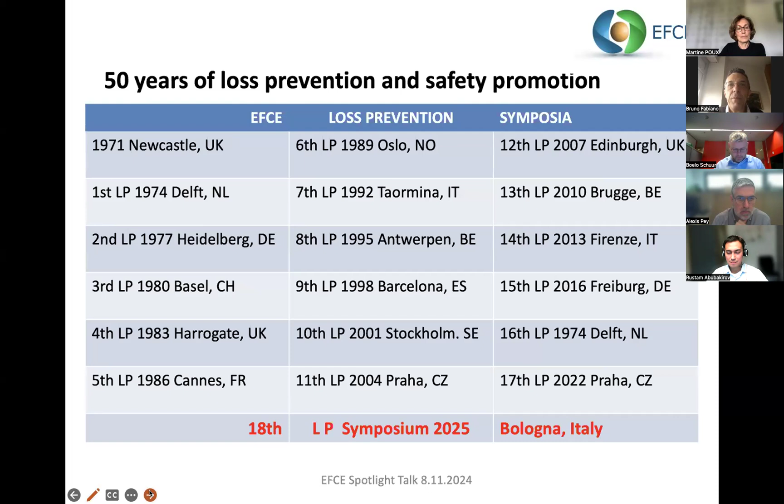The Loss Prevention Working Party organizes every 3 years the Loss Prevention Symposium, aiming at disseminating process safety good practice, discovering new techniques and approaches, gaining experience and lessons from past incidents and near misses, and allowing international networking among academics, industrial experts, and consultants.

In the next slide, you can see that on the loss prevention website, under the section history, you can find the content and full papers of all symposia, representing the history of safety and loss prevention, with free download. You can find the link on the EFCE website.

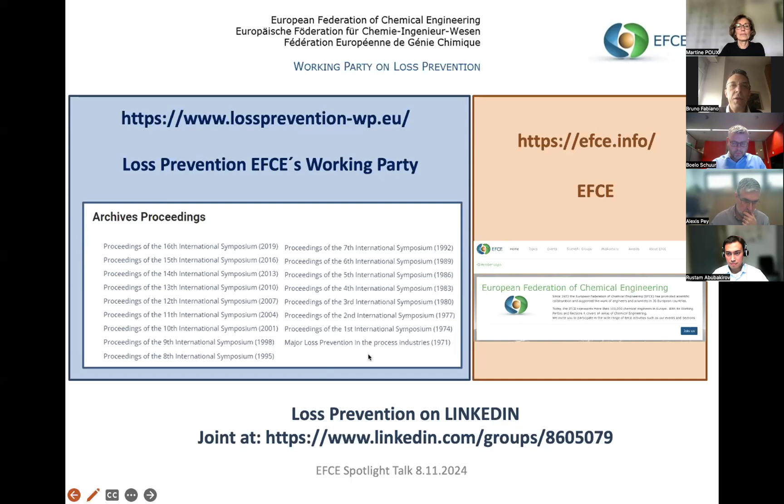On this ground, the following symposium, the 18th, will be organized in Italy, in Bologna. You can see in the following two slides the leaflet of the Loss Prevention Symposium, and the next one shows that Bologna is the oldest university site in Europe.

In this symposium we introduce new topics which take into account the newer needs of industries and the EFCE efforts to transmit the key messages relevant to energy transition, carbon-free, and safe and sustainable industry.

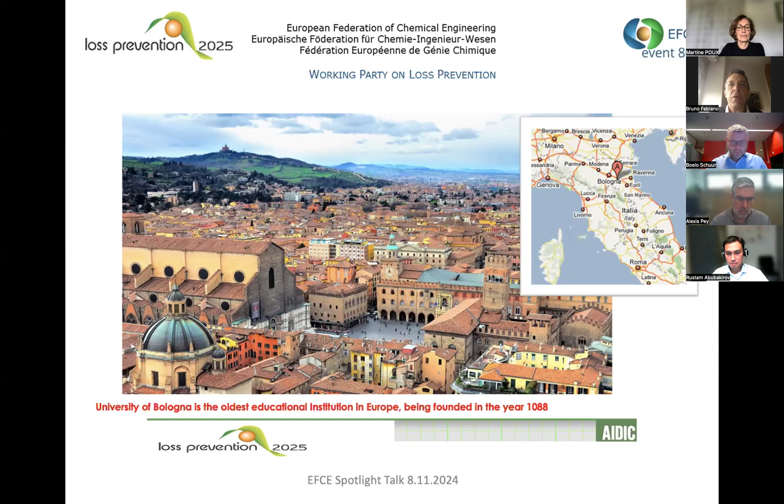In the next slide you can get an idea of the current topics: safety 4.0, AI, digital transformation, sustainability and resilience in the process industry, new materials and technology, and safety and security of chemical and energy infrastructures — really up-to-date topics.

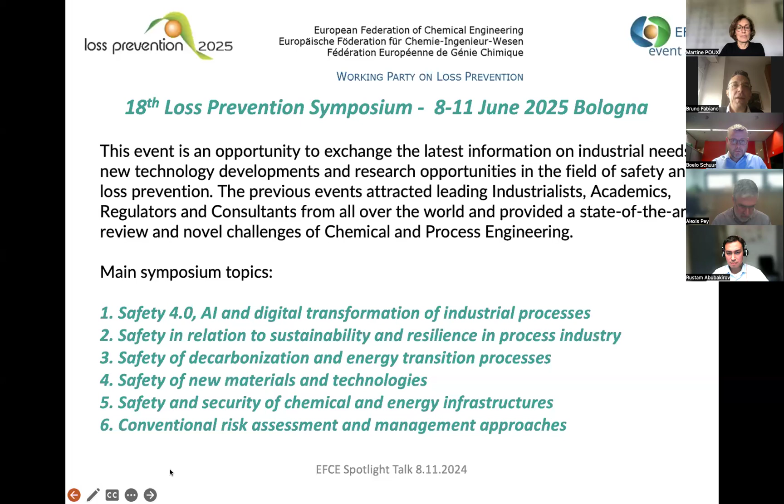Additionally, as you will notice in the next slide, in light of the recent issues posed by energy transition, digitalization, and required risk consideration and assessment methods, there are a number of specialized sessions planned and chaired by leading experts — for example, cybersecurity in the digital era, safety of liquid hydrogen, and integration of process system engineering with machine learning, and so on.

On these grounds, this webinar is organized to provide a flavor of the symposium, and it covers in its program both technical and human organizational aspects of the expanding loss prevention and process safety horizon.

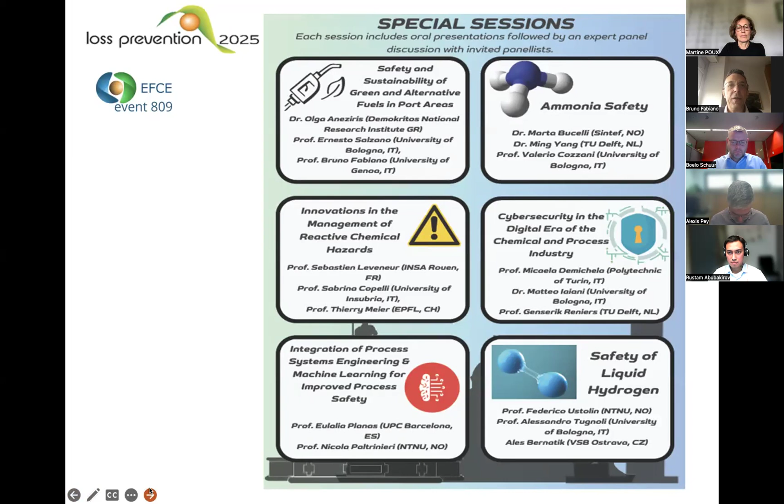The next slide shows that we have five contributions, and I hope that you can sample novel ideas and encourage cross-fertilization between specialist areas.

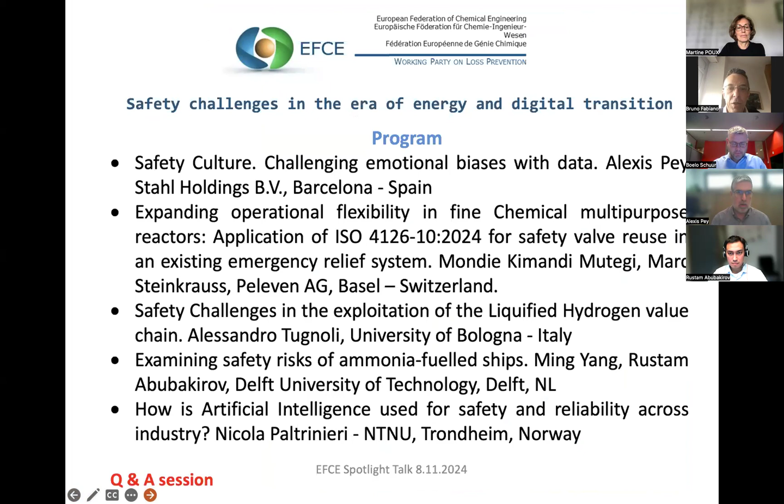Let me spend a few words about the speakers. The first one, shown in the next slide, is Alexis, who holds a PhD in chemical engineering and is an expert in process safety in the chemical, pharmaceutical, and food industry. He has worked for over 19 years as a consultant in fields related to risk assessment topics such as major accident, ATEX, electrostatics, thermal process safety, and facility design. He currently is a global HSE manager at STAHL.

The next speaker is Mondie Mutegi, who holds a PhD degree in mechanical and process engineering and has over 10 years of professional experience in the field of process and plant safety, especially in the areas of pressure relief and thermal process safety.

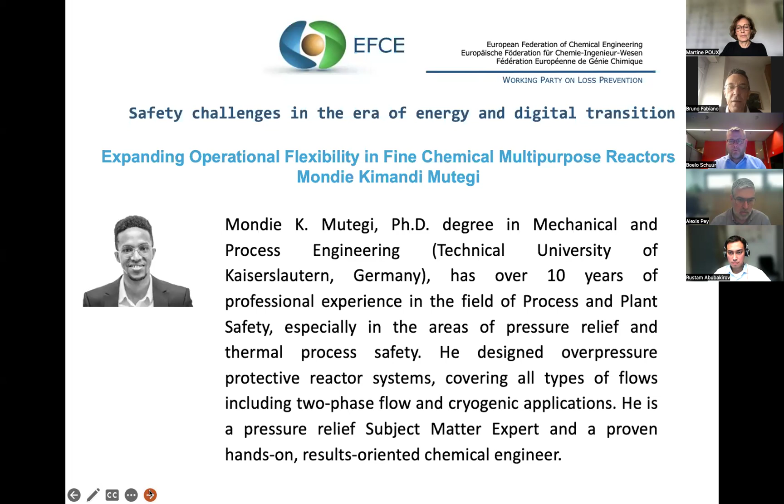The next one is Alessandro Tugnoli, professor of chemical engineering at the University of Bologna. He is principal investigator of the Horizon Europe ELVHYS and NICOLHy projects, addressing the safety of novel concepts for large-scale liquid hydrogen exploitation. The fourth speaker is Rustam Abubakirov.

He is a young speaker, currently a PhD researcher in the Safety and Security Science section at Delft University of Technology, the Netherlands. His main research topics focus on machine learning application for process safety and risk assessment, and safety management of ammonia-fuelled ships. At last, we conclude our spotlight talk with Professor Nicola Paltrinieri, who is Professor of Risk Assessment at the Department of Mechanical and Industrial Engineering at NTNU in Norway.

He is also adjunct professor at the University of Bologna, and he serves as Norwegian delegate of the EFCE Working Party of Loss Prevention and Safety Promotion.

Now it's time to get the spotlight talk off the ground, as the full program is dense with significant topics and we have a tight schedule. I'm not going to lose any more time, and I'd like to wish you all a very interesting and inspiring afternoon. I remember that we shall have a concluding question and answer session, so please write your questions at the end and the speakers will hopefully open the discussion.

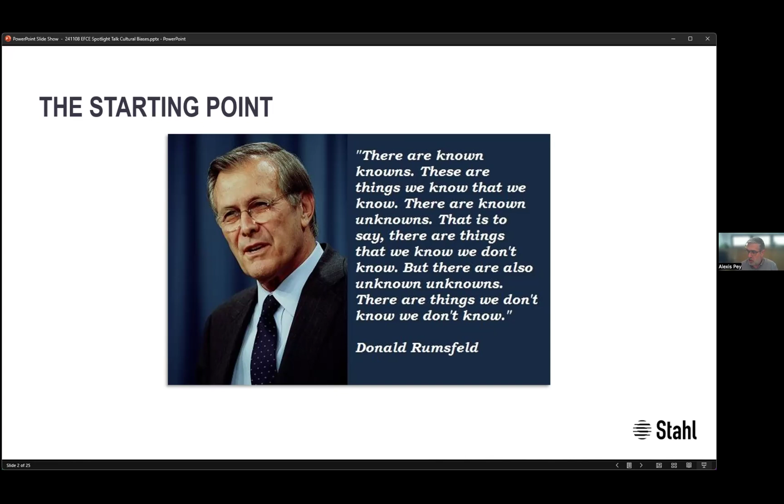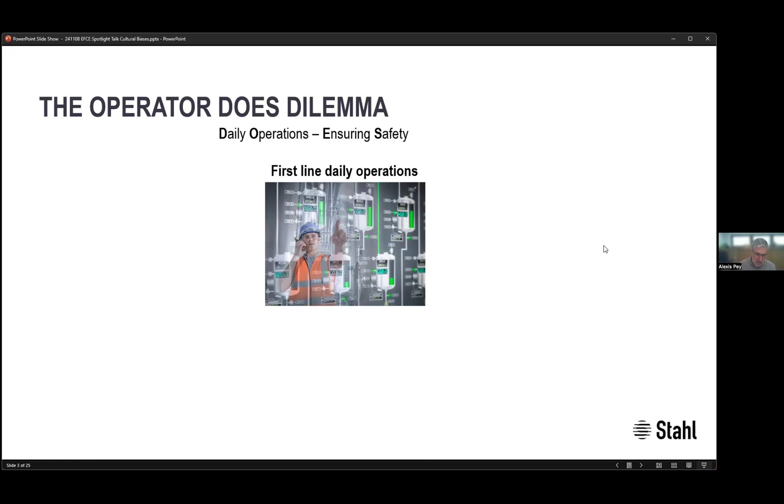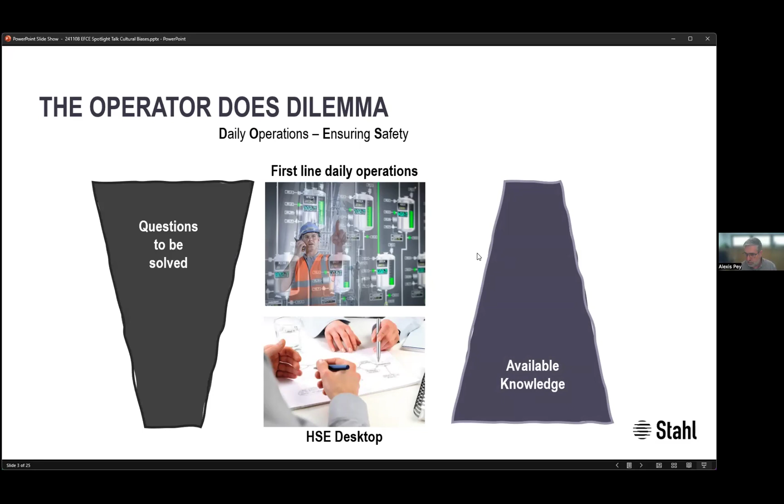So when you apply that in practical terms in chemical industry, we face a situation like this. The operators or the first line daily operations need to perform actions. And many times these actions are defined in terms of safety concepts from a health and safety desktop, somewhere remote to the plant. And the knowledge is not perfect. So typically there are a greater number of questions to be solved than the ones which are known at, let's say, safety or corporate safety departments. But in those departments, many times you have also a lot more knowledge than the one that you end up putting in the protocols, instructions, trainings, etc. So as there is no perfect match, the situation is that sometimes operators need to solve questions with lack of know-how, and at the same time, there is relevant know-how left out of production instructions.

So it is essential to understand the needs. And that is something that we identified at STAHL.

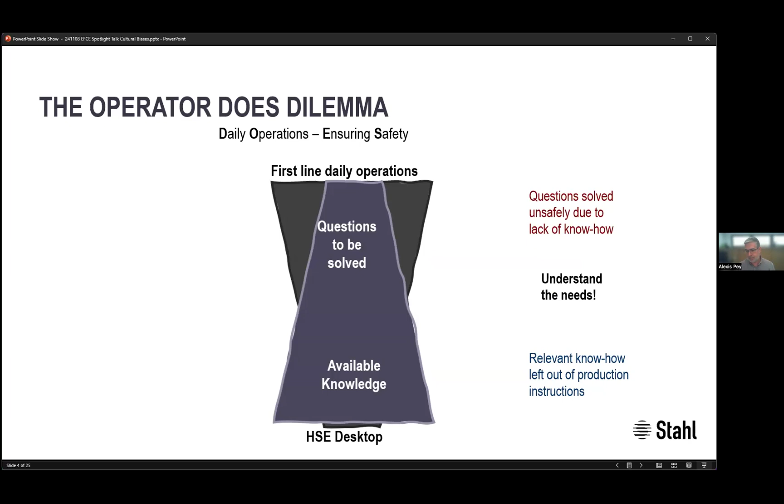And that we kept in mind. To generate statistics, to generate data, you need to be very effective. So what we did is implement an integral tool covering all steps. We wanted with a new tool to have all data collection, all data analysis, and drawing out conclusions from the same platform.

I will go a bit into the details, and then I will show you the results that we obtained when we implemented this tool. So at STAHL, we define three types of reports: damage, close call or near misses, and observations. They are familiar in the safety world, so we'll not explain the difference between them. Just to mention that for us, a close call, or in terms of LOC, loss of containment, is anything below 1 kilogram, and anything above 1 kilogram is a damage.

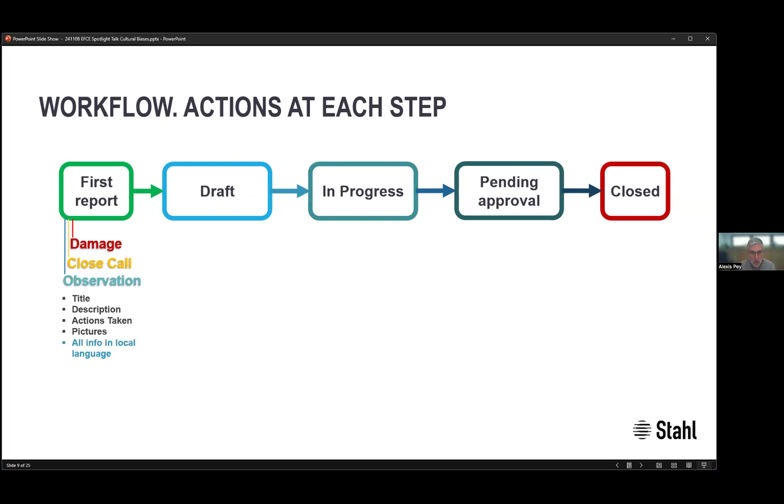We have plants in China, India, Brazil, Mexico, US, Netherlands, so worldwide. And to lower the reporting barriers, you need to allow them to report in local language. So when the first report is submitted, it's a draft. And then if this report is valid, we have to translate things into English, assign ownership, and define the type of consequence.

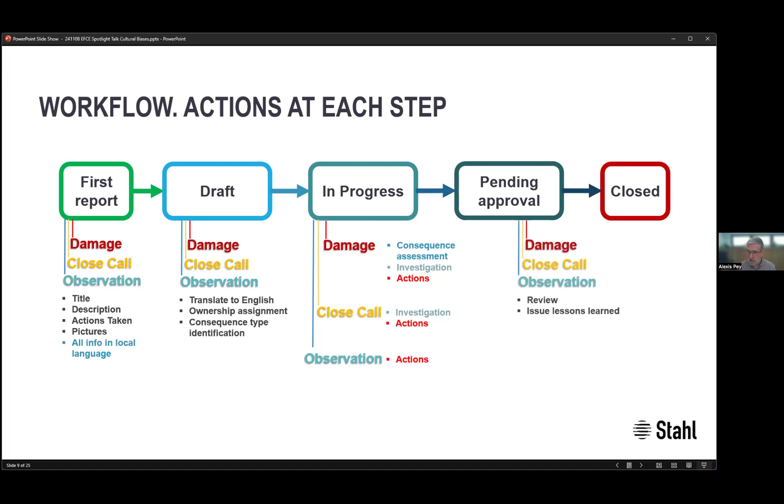And then when it sets in progress, depending on the type of report, there are things to do. If it's an observation, you can directly define actions to correct this observation and prevent it from happening in the future. If it's a close call, the option is there to issue an investigation and also define actions. And in case of damage, consequence assessment, investigations, and actions are mandatory. After that, the event is reviewed, approved, and closed.

The key point here, when we focus to be very effective, is to keep in mind that we need to simplify the understanding of what's happening. So basically, we want to have clearly what is the intended condition, what was the deviation, the cause for the deviation, consequence, safety measures, if they worked or failed to work, and the actions that we will take to avoid this again or to ensure that the intended condition will not deviate in the future.

We developed these concepts. I will not go into the detail of the methodologies, but we developed that together with the operational excellence and global quality managers, because we wanted to standardize practices between departments. So when there is a quality issue, operational excellence issue, or a safety issue, we all use the same tools.

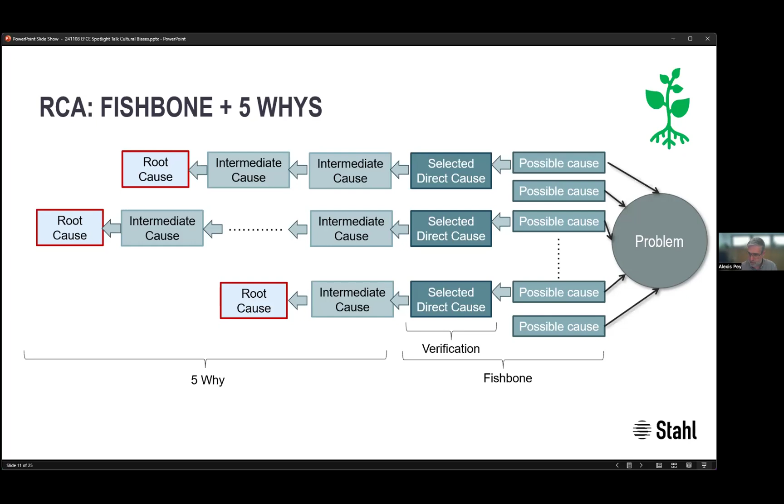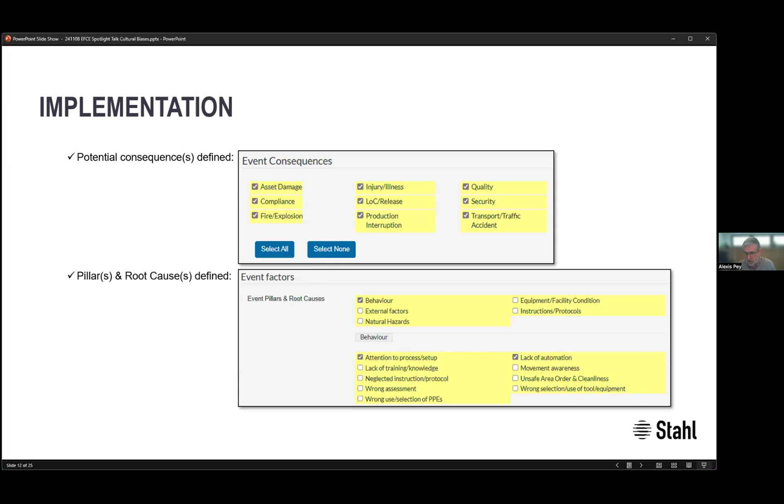And we all do this with some selection list. So you click and there are several levels, but it's not free text, because in case of free text, the data assessment becomes very different, because some people use different words worldwide to refer to the same thing. So the position was, we need to standardize, so we use click lists. We also define the operational conditions and the relevant assets.

What has been the effect of implementing this system? Well, you see the frequency rate in terms of reporting of observations and close calls. And the frequency rate is the number of events reported divided by the number of hours worked and times 1 million. So you see that the increase since we implemented the system is really huge.

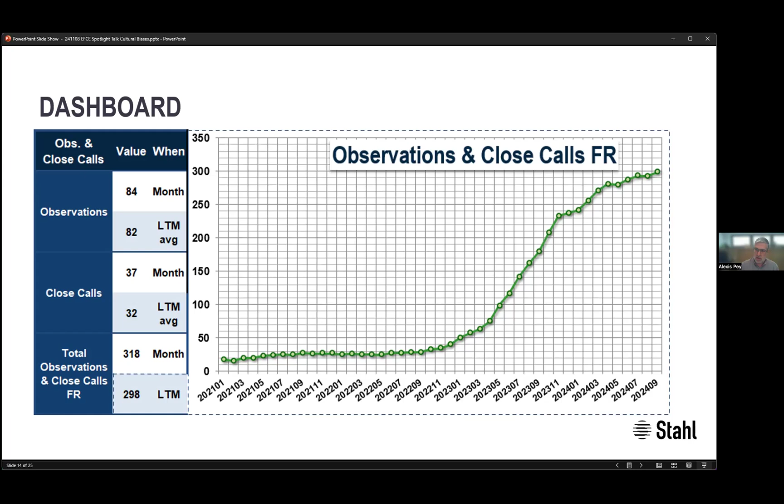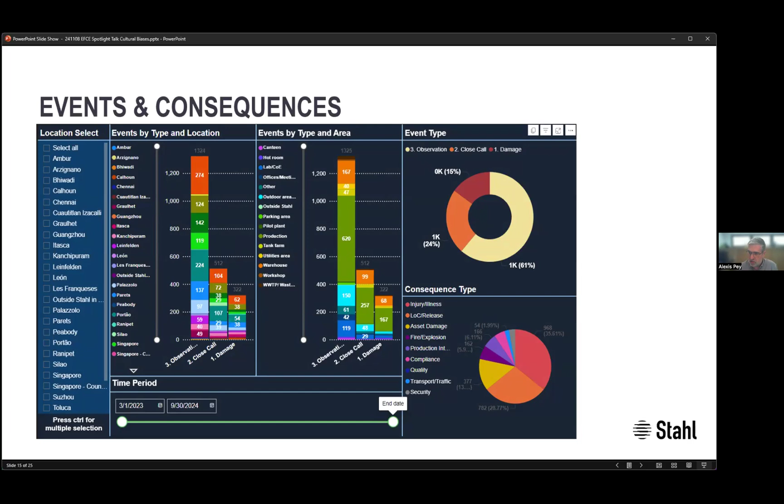So, but this is not the end. Then we also develop some infographics using Power BI, the Office platform from Microsoft, to make it visual what's going on. And this is what all plant managers, safety managers, so everyone at STAHL has access to this info. So they can select what's going on in their plant and then understand what has to be done. So I will show you a few of them.

So the first thing that we can see and we can ask, are we reporting enough? Well, in this figure, you see that we are reporting a lot more observations than close calls, and more close calls than damage, which in terms of the Bird pyramid, it's okay. And that was not the case before we implemented this system.

Also, we can see where is our awareness. If you remember the definitions, a damage or close call, near miss, is where something actually happened. The difference is the level of severity. So we see that in terms of damage or close calls, things actually happening, we have more LOCs than injuries, and more injuries than asset damage. While if we look at the observations, we see that the most observations refer to people potentially getting injured. So we identify that people have more awareness to situations that can cause an injury than situations that can cause an LOC. But in reality, we have more LOCs than injuries. So that was interesting to understand why, for instance, we have this LOC level.

We can also assess the safety pillars, and you see here the safety pillars. So typically you tend to see that many times it's just said most of things that happen are just behavior. Well, in this case, we see that behavior is a very important part, but equipment condition is identified many times also as a critical safety pillar.

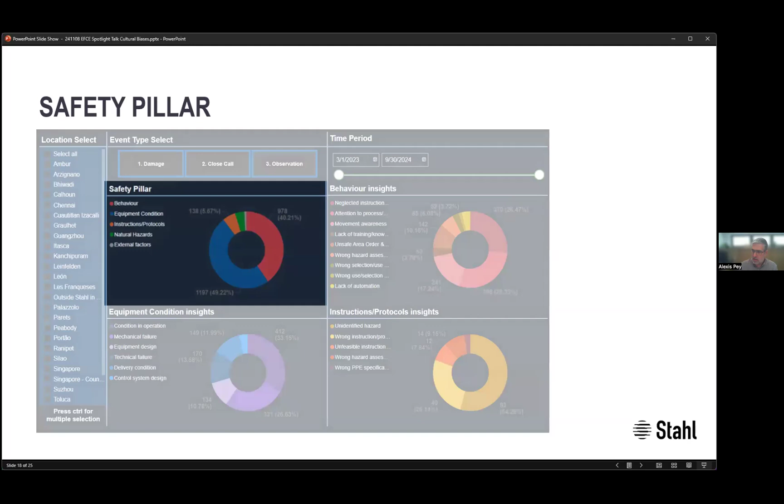And if we go a bit into details of this, the concept that we are applying is, if we compare behavior and assets, equipment condition, we are implementing this concept: if behavior and assets are wrong, then this is really a threat to kill the activity. If you only focus on behavior, but you are not improving the assets, at the end people are really fed up because they want to work in a safe way and they are just fighting with equipment that is not working.

And we saw that also in other safety forums with other companies. If you invest a lot in assets, but the behavior is still bad, basically you are not making good use of money. You are burning money because the assets which are brand new with a bad behavior will degrade or become very easily in a bad condition. So the only sustainable and good corner is where you have good assets and good behavior.

And being fair is important, because if we focus only on behavior, well, we know that we work with people. People is a lot less reliable than any automatic control system. So we need to be aware of that. We need to keep fairness, but also make people understand that safety starts also with behavior. So there is a clear relation.

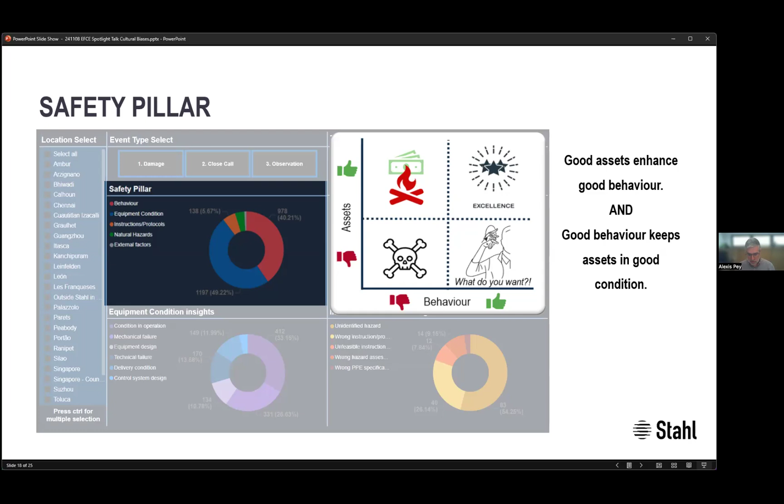Now, if we focus on behavior in sites, what we learned is that a significant number of behavior issues, and this is not just damage, it's damage, close calls, and observations, are neglected instructions or protocol. Why are people neglecting instructions and protocols? Well, time pressure, lack of perception that what they are doing is important to be done in a specific way. And we are addressing that with leadership and discipline.

Be clear and be fair. Because we need to understand that there's a difference. For instance, if you have a checklist with a signature or a confirmation in a control panel and you neglect to do it, typically is a neglected instruction. But if you have just a generic instruction requiring a check, for instance, before starting a transfer, check that the facility is in the right condition. Well, it is requiring a check, but it's not specific, and we can make a mistake. In this case, we classify that as an attention.

The root cause in terms of behavior is not enough attention to process setup. But of course, you can make once a mistake, but twice or thrice. So at the end, we can also assess that as a neglected instruction if we see that this is happening several times with the same person. But we want to remain fair. This is really important. We also could identify that sometimes lack of automation is playing a role.

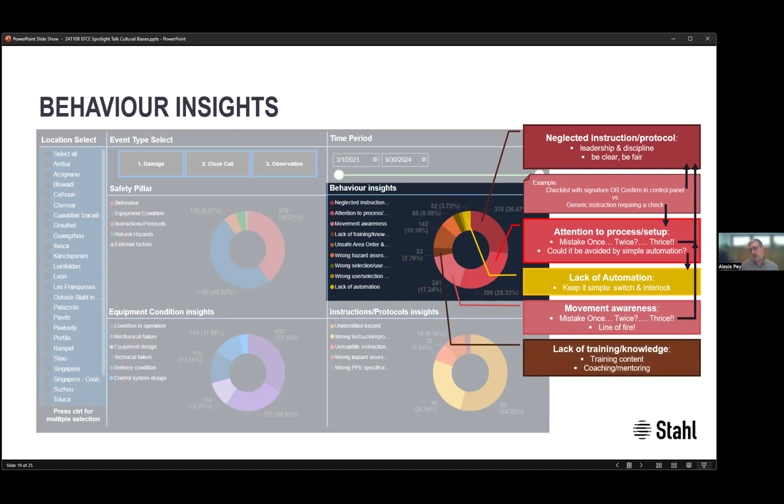And again, if we fail to do it repeatedly, showing lack of awareness, at the end, we have to address in terms of neglecting instructions or protocols. And also lack of training and knowledge. Do we have enough knowledge? Do we have enough training? Many times this is addressed in some cases, and we also can quantify.

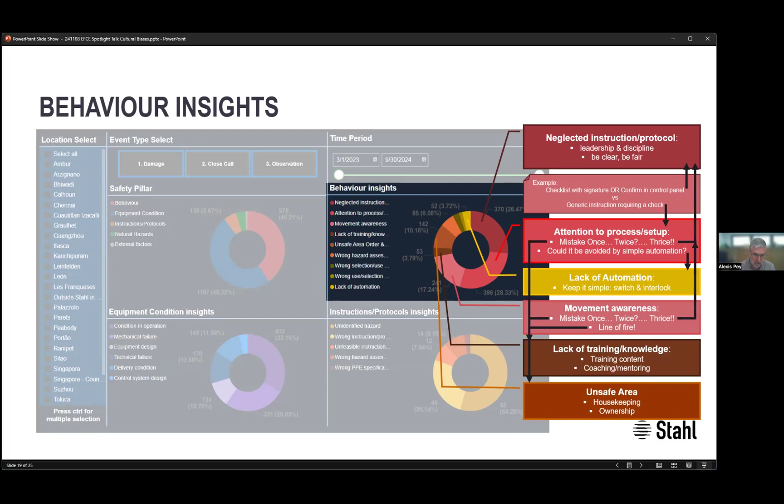Okay, finally, another relevant part is an unsafe area, and this is addressed through housekeeping practices, improvement of them, and ownership. So the shift handover, how you leave the facility for the next shift, etc., is being also supported in terms of 5S and housekeeping and operational excellence programs.

When it comes to equipment conditions, we can see that sometimes the main cause is the condition of the equipment in operation. It is the actual status. Other times we have mechanical failures or technical failures. We also see that sometimes, in let's say almost 11%, it was a wrong design, and that almost 12% is a delivery condition.

So for instance, an IBC or a drum with a pinhole or some hole that we fail to identify, and when we fill this drum or this IBC, there is an LOC. That would be an example of delivery condition.

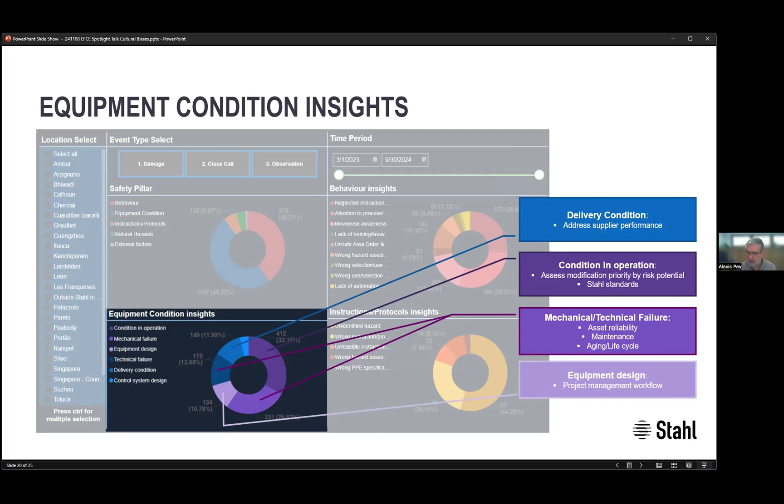In terms of instructions and protocols, we have also some insights: unidentified hazards or wrong assessment, because we are quite critical towards our own methodologies and what we do. I mean, we don't want just to blame people. We want to put first the focus on what we have done from a safety point of view. Have we identified the hazards properly? Have we made the right assessments?

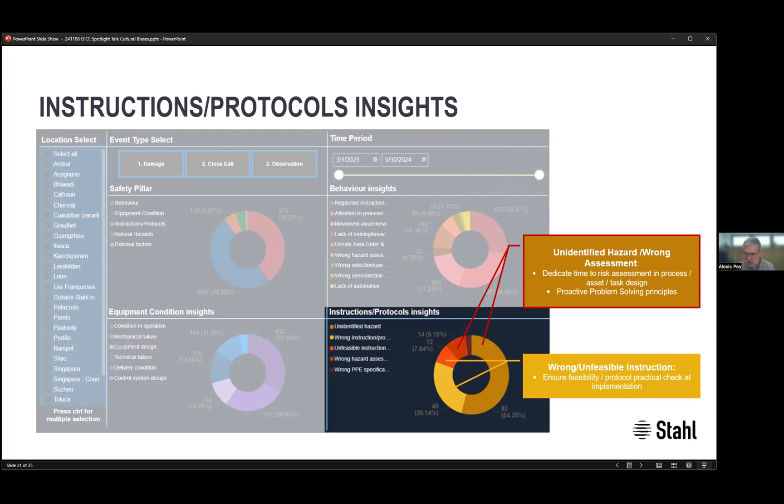Wrong or unfeasible instructions. This is also happening sometimes. We issue instructions that then are not feasible. Even if we have an implementation process and we supervise the first batches on the first task, things happen after this first supervision which was not happening during the supervision period. And then we see that sometimes it's necessary to review instructions.

We are in the lowest values that we had historically. So it's a very big contribution and a good improvement.

So as a summary, the principles: we report data not to change reality, the reported data does not change the reality, it only defines our perception of it. So we want to have a lot of data so that our perception of reality is as close as the reality as possible. If that is wrong, we will set the focus in the wrong direction. And a good report does not need a lot of time.

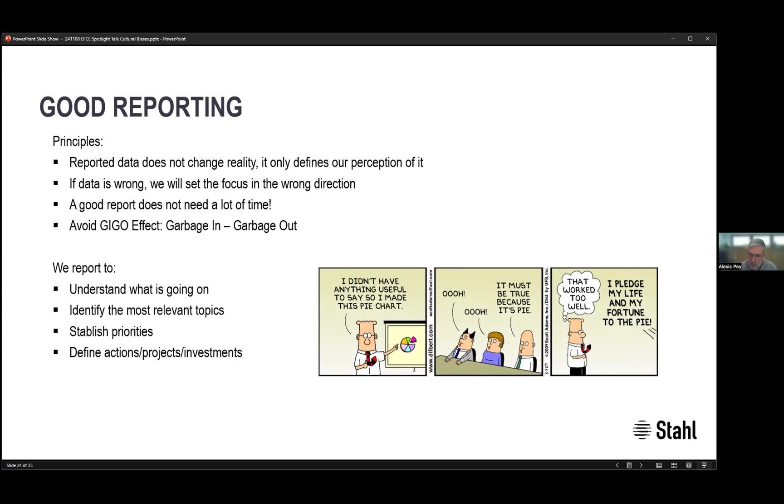So we want to avoid this situation of just showing figures, graphs, etc., because, well, we have nothing better to say. That's all from my side. Hope you found it interesting, and I will gladly take any questions.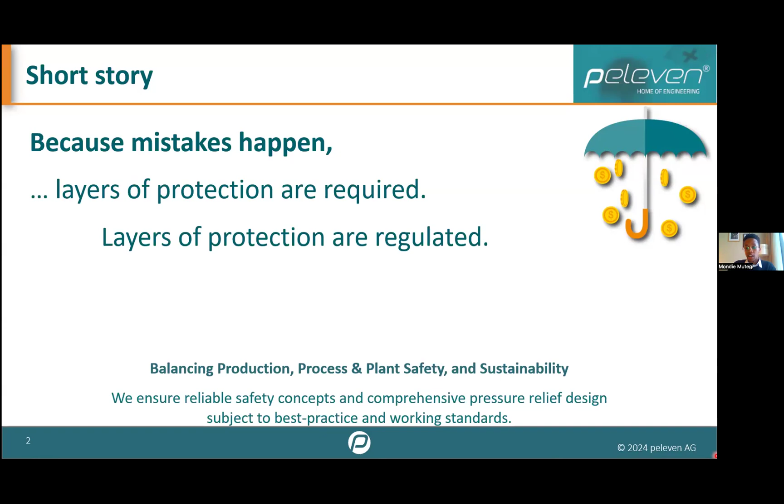So I want to tell a short story. The short story goes like, because mistakes happen, layers of protection are required, and layers of protection are regulated. So we size your emergency relief system safely and sustainably. So that's the path to safety. And the intention is to really balance production, process and plant safety, and sustainability. The topic on sustainability is becoming more relevant as companies are required to do reporting.

And so we ensure that we have reliable safety concepts, comprehensive pressure relief design and subject to best practice and working standards. Again, beyond standards, not just meeting the minimum requirements, but really going beyond that.

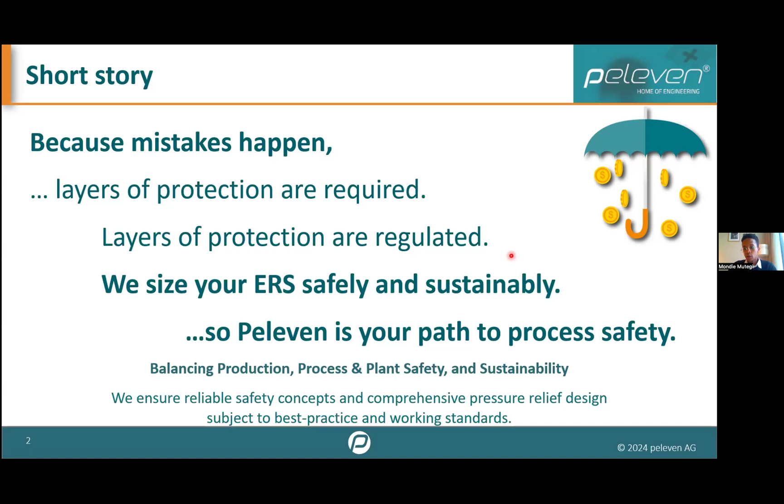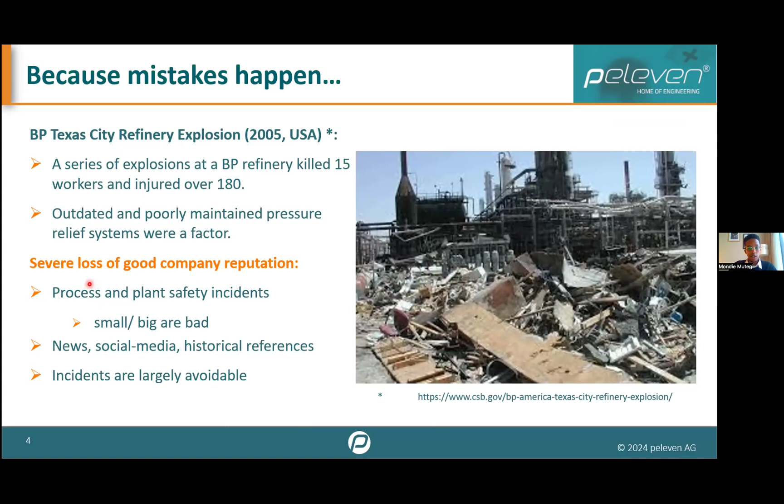Okay, because mistakes happen, I'll be faster here. I just want us to look at it optically. Mistakes happen, we have heard about this. But when such stuff happens, there is severe loss of good company reputation. It takes a long time, as we have seen in the previous talk, and a lot of effort to attain a good degree of safety. But we can't blink for a second, because blinking for a second can cost enormous good company reputation.

I don't know where to put this, but there is media that's actively aware, and there is the society that wants to be informed about what's happening. So really avoidable process and plant safety incidents may lead to loss of life, assets, affect the environment, and they quite easily end up in news headlines. And again, company reputation is here. I don't know what price somebody can put to that. If you lose a reactor, you can say you've lost a reactor and you can put a value to it. But quantifying good company reputation, or the loss of it, I submit that this is costful, very costful. Of course, loss of life is the biggest loss that one can experience, and that has and must be avoided.

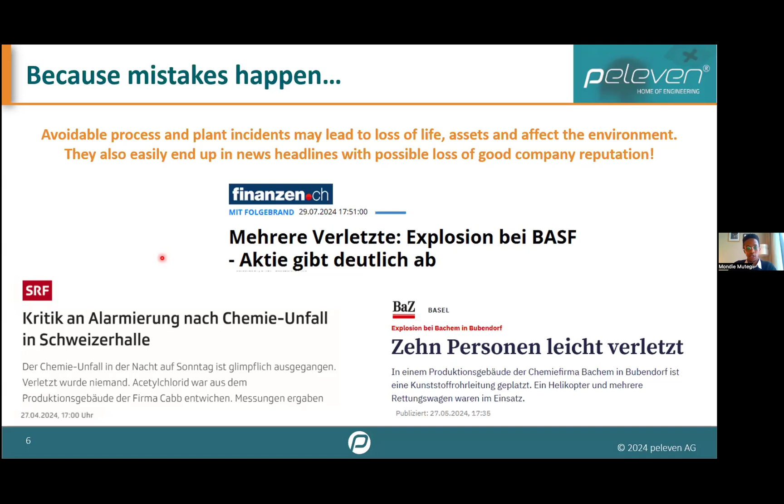So to avoid all this, for example, we have the layer of protection analysis. In essence, it says like, if you have a risk, or if you know your process, you have chosen the location well, your equipment has also been set up quite well. The things that you're looking at is you have your risk. You don't want it to go outside and go to the community, for example, outside your site. So you monitor the process, you do trainings, you do alarms, you have manual instrumentations or manual interventions.

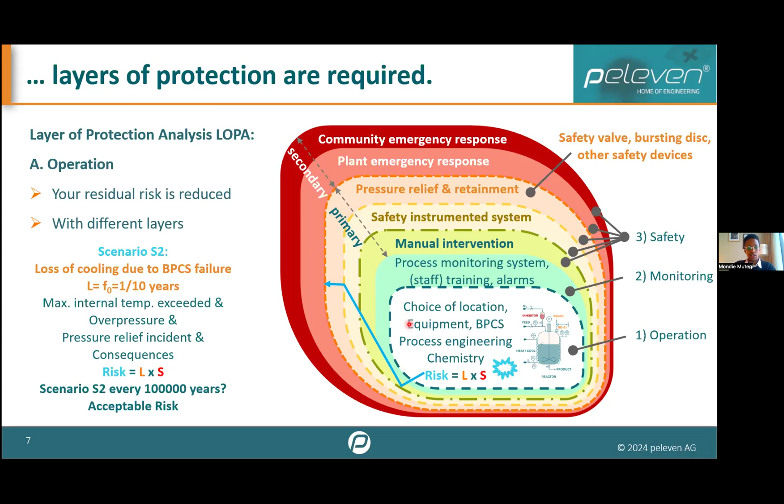And then after that, you have the safety instrumented systems. And this talk is about the pressure relief valves, which are located definitely in the area of the primary safety measures. And after that, at this point, probably there has been some loss of containment, and we switch then to the secondary measures, which include plant emergency response, community response, and so on. So the main aim is to really prevent this risk from getting outside. It doesn't matter where we are not able to do that. All of this is of primary importance.

Okay, these layers of protection are regulated so that they are potent, so that they're effective. And for example, when we are looking at the pressure relief and the retainment system in the context of a pressure relief device, often the probability of failure on demand is set to 1 in risk analysis, but it's only 0.01 if it's properly sized, considering inlet and outlet piping, selected, installed, maintained properly. So if any of these steps has not been done, it would not be prudent to give it such a low PFD, because this low PFD means that this device is reliable.

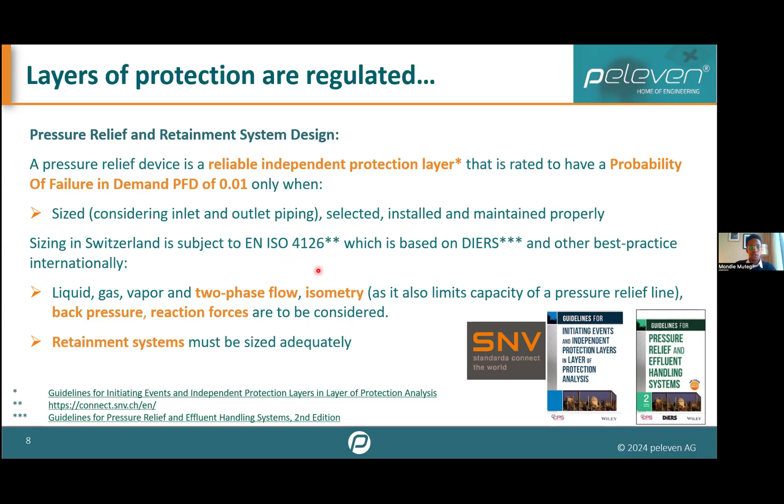So sizing in Switzerland, as in the European Union, is based on ISO 4126 when it comes to two-phase flow, which is based on DIERS, best practice, etc. And we notice that for two-phase flow, the isometry or the pipe run is very important, as it also limits capacity for the pressure relief line. If we recollect the layers of protection, we observe that the retainment systems are also supposed to be sized adequately, even if they are not specifically referred to in the standard. We need to make sure that we are venting from the reactor to a safe discharge location. So what has happened?

If we look at the works of, for example, Sam Mannan, documentation is also important. So you just don't size according to a standard and say, I've done it.

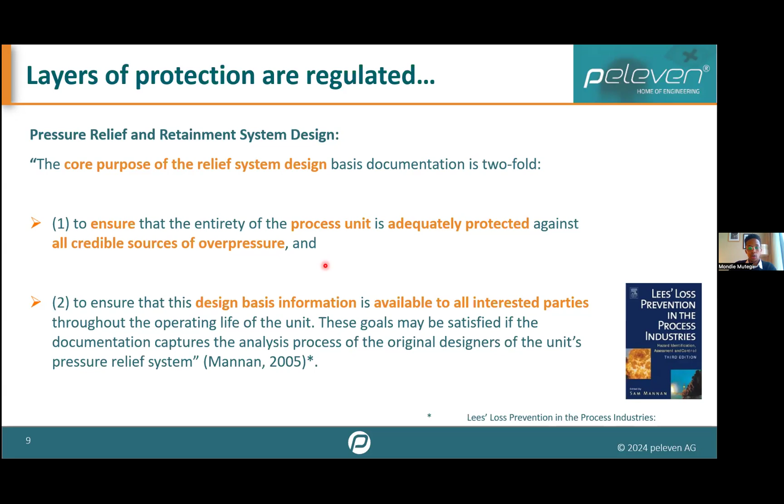When doing relief design, it's important to do proper documentation for two reasons. First, to ensure that for as long as this process unit is alive, it's adequately protected against all credible sources of overpressure. Second, to ensure that this information is available for interested parties, for example, if somebody is new to the company, they should be able to access this information throughout the entire operating life of a unit.

So what's new? There is a new standard: ISO 4126 Part 10 of 2024. It's for sure revolutionizing the way we size safety valves and bursting discs. It's the first major revision in 14 years, and has twice as many pages as the previous version.

When it comes to what causes two-phase flow, the vessel swelling, revised assumptions, a new expanded sizing model determines the relief capacity of your pressure relief system or emergency relief system, including the associated piping to a safe discharge location. The model is consistent, and as we will see, yet numerically challenging.

So what you benefit from are more accurate relief area assessments with adequate safety margin, consideration of isometry upstream and downstream. And the new standard now also covers cryogenic vessels and inclusion of liquid viscosity corrections.

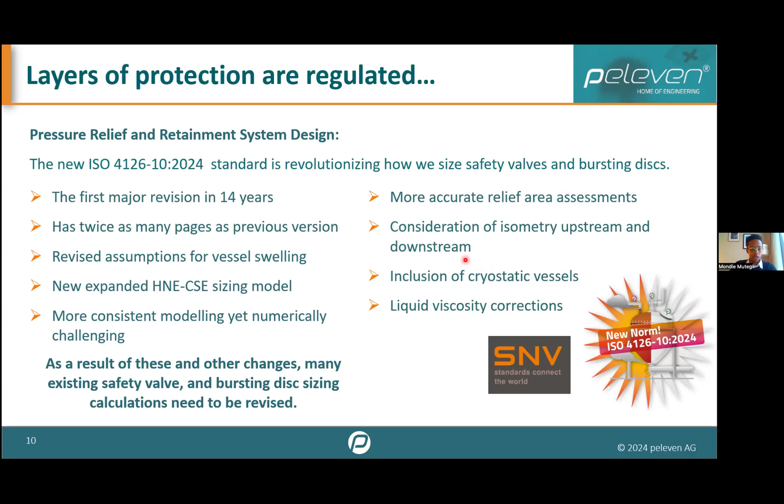Of course, we'll not go through all of them. The summary is there's a new standard, it's completely new. So if you have old sizing calculations, it's worth investing in checking that everything is still okay when it comes to sizing existing safety valve and bursting disc devices.

So let's jump into the world of ISO 4126 in the context of sizing pressure relief devices, be it safety valves or rupture discs. The standard includes 5 sizing steps that are marked in green and orange.

So you have to identify from risk analysis all plausible sizing cases. Then the standard goes directly to step 2, where you check if you are having two-phase flow. Then you determine the relief requirements, the mass flow rates to be discharged. Then you determine the relief capacity of the emergency relief system, that is the dischargeable mass flow rate.

And after that, you check, is everything okay? Are my pipe reaction forces okay? Is my valve doing what's called fluttering, chattering, or pumping—you know, the definitions of all that.

So there's one step which is not implicitly or explicitly referred to in the standard, but it's important: checking that the input you've put in is right. Garbage in, garbage out, like we've had before, and also checking the substance data.

And in this one, I will also focus on a very important thing that happens: the topic of overfilling. We want to produce more, so it can happen that the filling level at 20 degrees Celsius, for example, for such a reactor, is set to 85%. In this case, we can consider that, for example, we're having a loss of cooling failure for this demonstration. The medium is acetonitrile. So the first question, even if it's not in the standard, beyond the standard, is: are we overfilling?

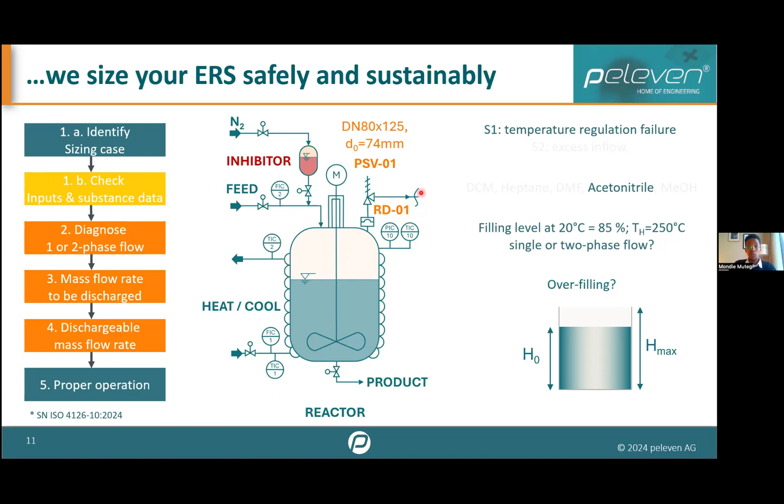So let's dive into an example of an old client who had what you'd call an existing facility with an installed safety valve. It's multi-purpose, and one of the scenarios identified was a physical scenario: loss of cooling. These are the parameters for the reactor: allowable working pressure of 6, sizing pressure was specified as 10% above the working pressure, internal diameter, total filling volume. I've rounded up the numbers intentionally so that it's able to have the 85% and everything else, so that the numbers are better legible. The heating jacket has a wall temperature of 250.

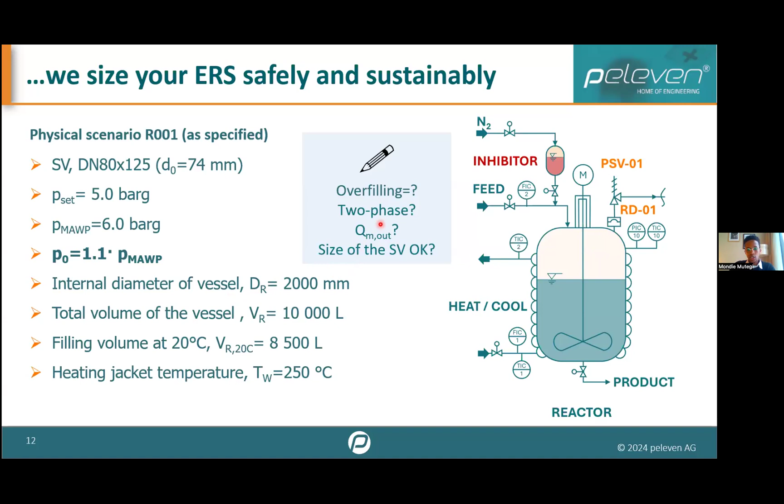That's the general arrangement we're going to be looking at in this presentation. So, is there overfilling under these conditions? Is the flow two-phase flow? How much must I discharge? And is the safety valve adequately sized? We seek to answer those questions in this talk.

For this, we have a tool with inputs done in the usual user environment, Excel. The whole computation, logics, modeling, validation, and versioning are managed in PTC MathCAD for quality management purposes, because we are dealing with the last line of defense, and it has to be of good quality. It must not fail—remember the probability of failure on demand. We go the extent of making sure everything we're doing is proper.

Once the calculation is done in PTC MathCAD, it's given to the user for interpretation. One notable thing in the new standard is that it requires those sizing pressure relief devices to be adequately trained and competent in the field. So you don't want to just click stuff. You need to know what you're clicking, because without care, when you calculate, you'll always get results. So you have to be in a state to understand and interpret the results correctly. The orange part helps the user to a good extent, but the user still has to be competent.

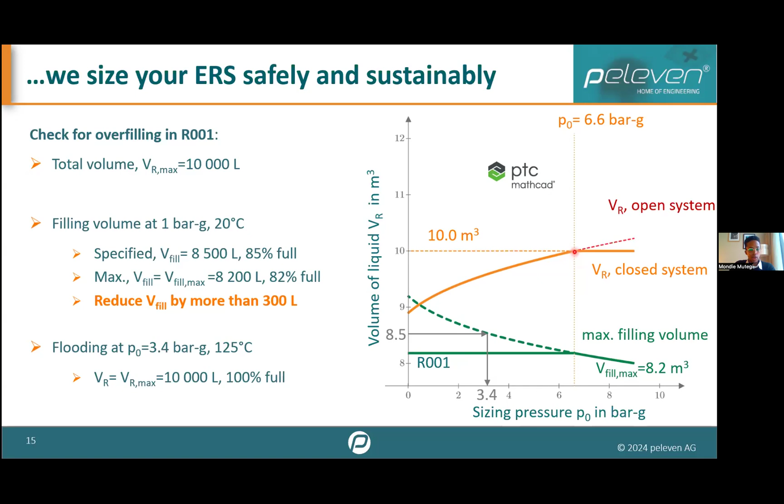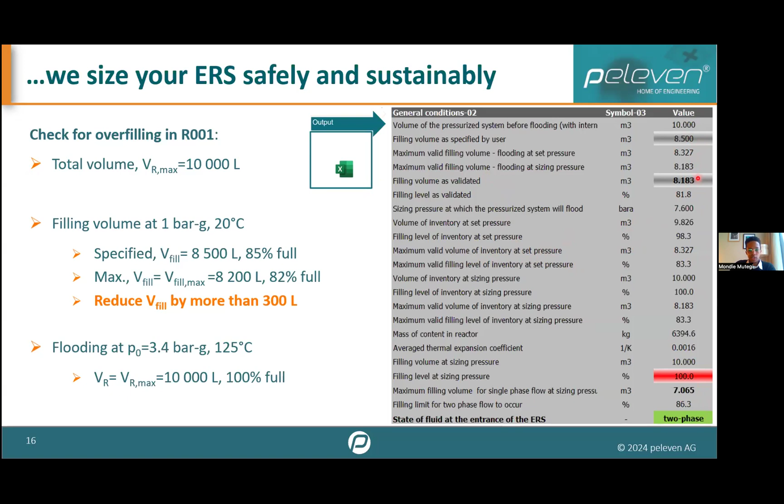So we reduce the volume by more than 300 liters, and our chosen point is 80%, or 8 cubic meters. The calculation tool will warn the user when overfilling is detected. It will tell them: you wanted to fill to 85%—no, it's not possible, the maximum filling volume is 8.1—and it will warn them that it's overfilled, and tell them, okay, you're in two-phase flow. So the user is informed optically, so they don't have a chance to just move on because they weren't able to interpret the data themselves.

Then for the example, now we go with a lower filling volume. Again we go to the tool and see how you predict two-phase flow. The standard has—I hope some of you have looked at it—a battalion of equations, very many equations. One of the diagrams present there is this one. It shows, in essence, four different conditions: turbulent and bubbly, for different parameters.

If you're below—let's look at the turbulent one, which is valid for this case—if your operation point is below this continuous green line, you are going to discharge gas or vapor, more precisely vapor. And if you're above it, as we see in the purple point, we are two-phase. Again, the user doesn't have to get into the confusion of what parameter to use when. The logic in the program predicts that it's two-phase, and guides them based on the inputted parameter and the logic included in the standard. It will guide the user to the right curve to use technically.

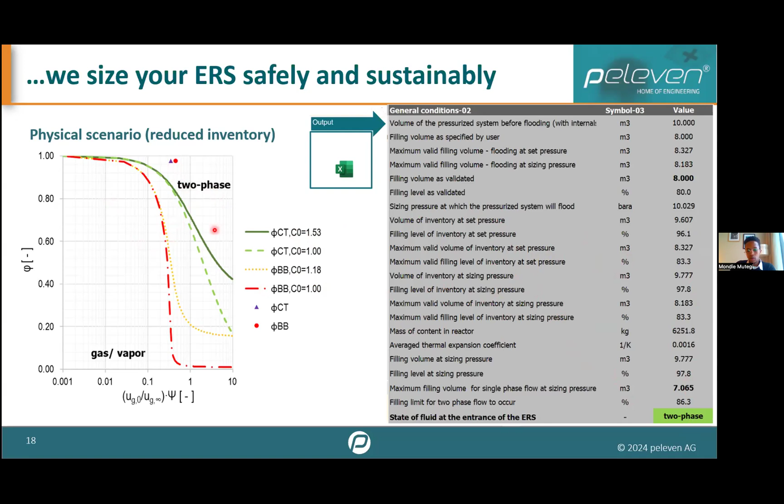So what we are seeing here is the back end, and the front end is this, and the user will be informed about which models have been used.

Away from that, we now know that the flow is two-phase. How much should we discharge? And what's causing the trouble in the reactor?

It's heat input. When we look at the curve to the right, we observe the specific heat input, which is the heat input from external heating in kilowatts per kilogram, and here we have the sizing temperature. As we are heating, we get to the saturation point, and we see that these two curves, considering the sizing temperature and associated sizing pressure, have a similar flow.

One can work with temperature or with pressure, but since pressure is mostly what we are protecting against, over pressure, we continue with this. For external heating, as you increase the pressure, you reduce the heat input because the sizing temperature goes up and the differential temperature between the wall and the contents reduces. Therefore, the heat input goes down.

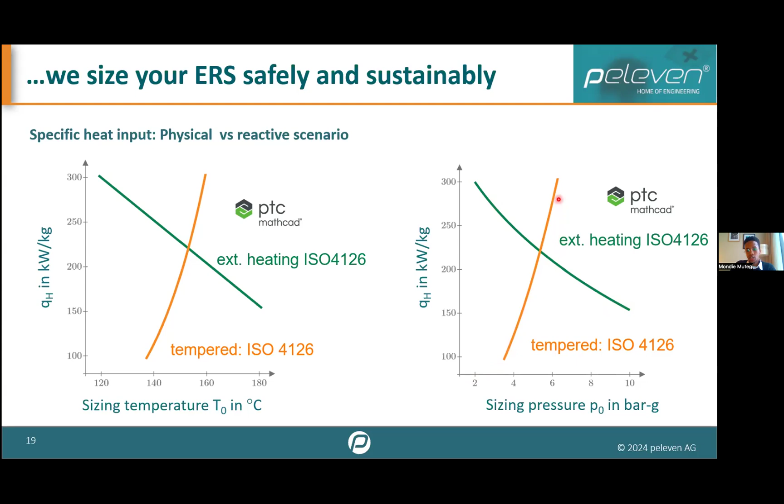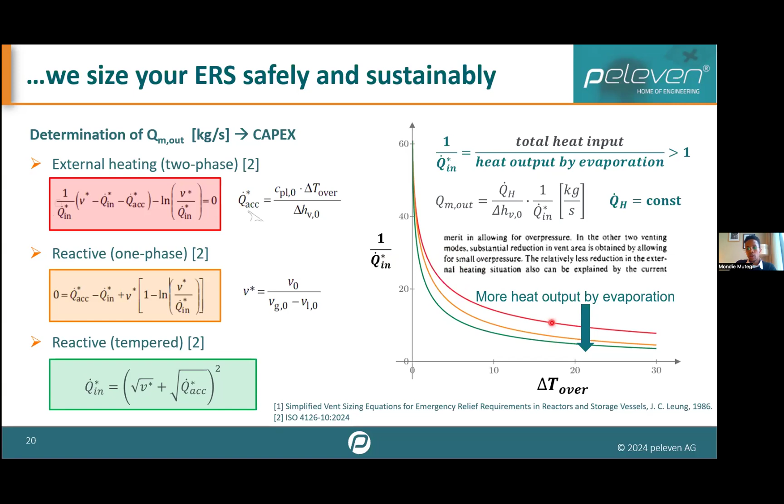One observation is, if we give the reactor a constant amount of heat, one will have to discharge more for external heating than for reactive cases. Why? For reactive cases, part of the heat results in evaporative cooling—you're bubbling and there is evaporative cooling. That's why some of the heat is not used to create mass flow rate.

So how do we validate equations? There is a work by Leung from 1986, which gives this equation, and there is the standard. Again, don't focus on the equations, just focus on the trend of the mass flow rate that has to be discharged, the relief requirements. For external heating, we come to the conclusion that two equations developed by two people with two different approaches come to similar results.

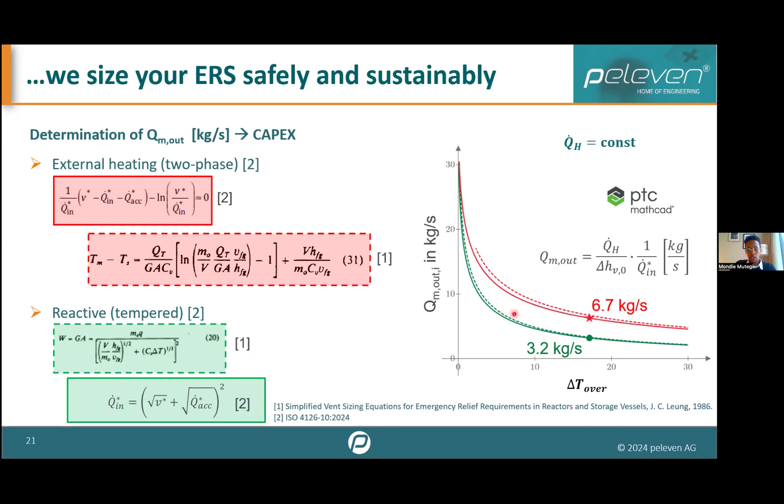This holds for external heating as well as for the reactive tempered equations, which is something you want to see when you're modeling and validating the model. So this is good.

Next step: how do we improve the CAPEX? Again, the same equations for mass flow rate to be discharged against the sizing pressure. We have the tempered Leung and the tempered ISO, and the external heating in green. In this case, for the sizing point, we would have to discharge a mass flow rate of 29 kilograms per second. This is where, if you're sizing equations and you're not seeing this, you are not able to improve your CAPEX.

If you size at this point, you find that you're able to cover the external heating and the chemical reaction for your multipurpose plant in one. Again, the tool gives you this information, calculates a number of mass flow rates, and selects the one that's valid for your system.

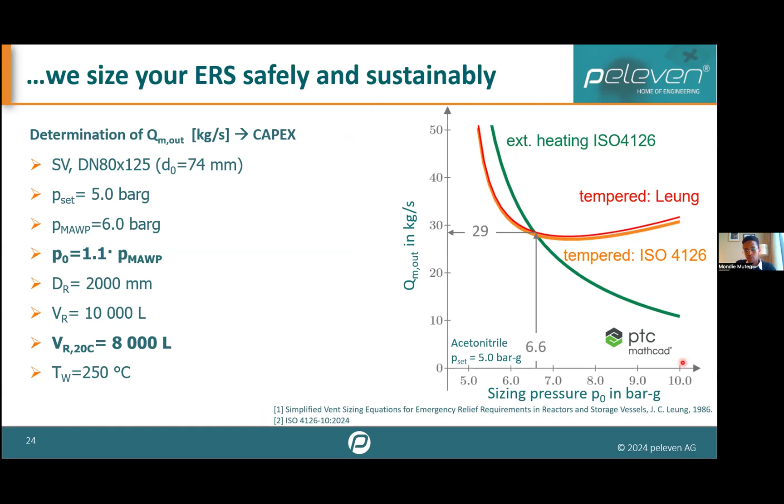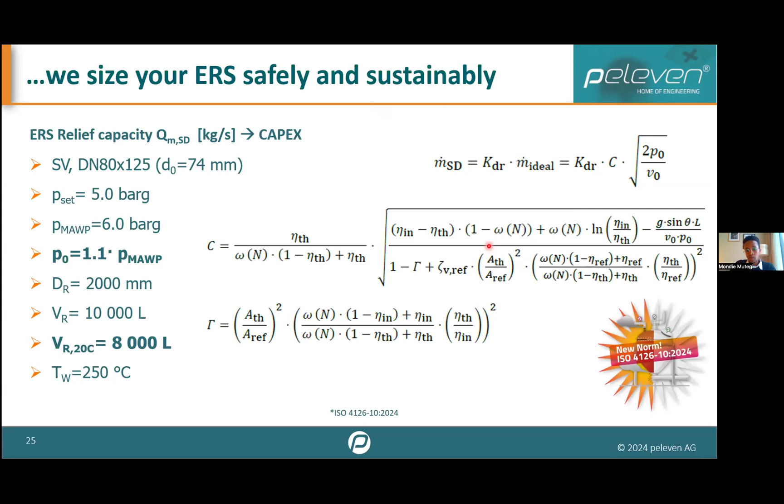In the interest of time, we move to the next topic. Again, we are not looking at equations, just to bring the point home that the equations in the standard require a lot of computation and are complicated. Let's now look at the vent line system. We are looking at a piping system with 6 segments, and the safety valve is installed in segment number 3, and this is the exit.

If you look at the nozzle, this is the operating point, this is the choking point, and we observe that this point is not choked—it's at 55%. If we move to the safety valve, we see that the operating point is at the choking point, so we attain choking there. If we look at the next component, the exit of the pipe, we also have choking.

This shows that choking can happen anywhere in the vent line system, and it's good to investigate it. So if you have choking at the safety valve, don't just assume you are done—you have to match through the piping system, and this tool does this for us.

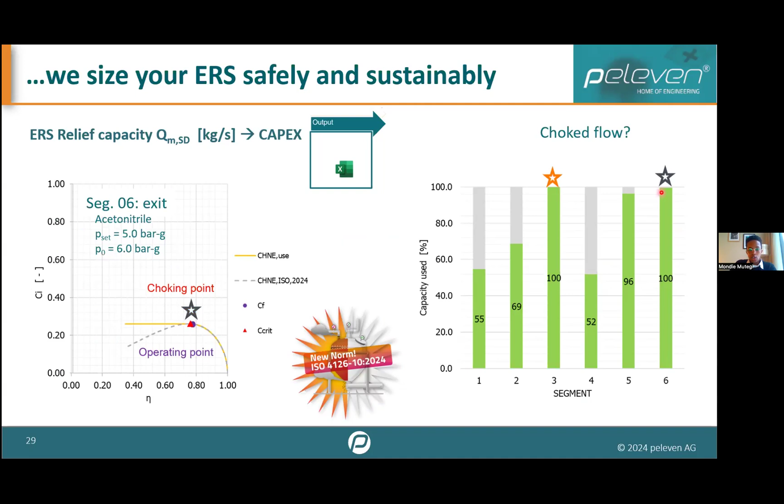I'll jump to the conclusions so we don't overshoot. We have seen that if we apply the current standard, it's possible to improve your capital expenditure. So when you calculate and get results just by user input in a few fields, don't be happy—it's good to look deeper, because you're saving a lot of money.

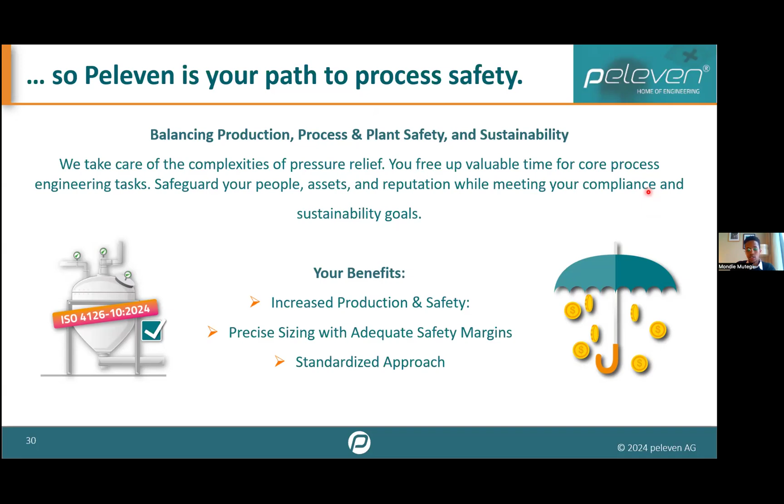We are glad if you get in touch with us. If you have questions, questions are always good. We are happy to answer your questions and to attain the next level enhancement of process safety in the area of emergency relief. That would be the end of my presentation. I'm happy to take any questions.

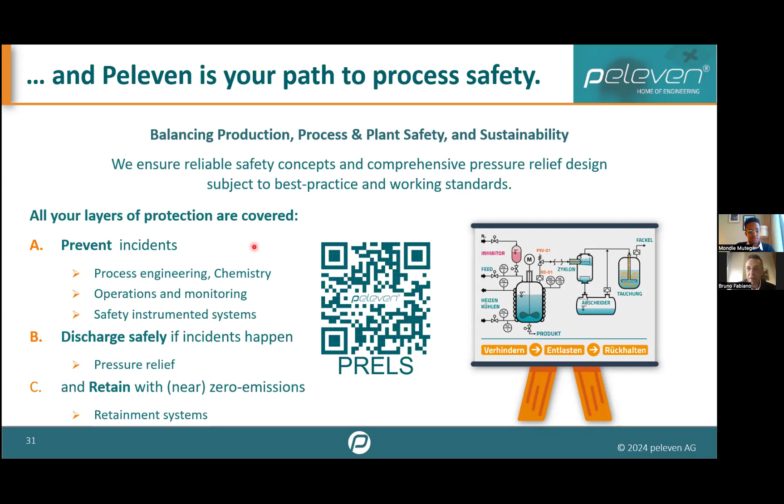We received a comment from Jean-Luc Revel, who I thank, asking whether the probability of failure on demand of 0.01 also integrates the management part. Well, there has been a white paper released by Dechema, and I'm sure that if you're really managing the installation, managing the sizing, managing the selection, overall it's the management that really determines safety at a site. So yes, the management has to support all that, if it doesn't work as well as it should.

Thank you also for showing the new opportunities posed by the newly enforced legislation and the new insights on the safety aspects of this important technical aspect of our reactors. And maybe a feedback to that: if one really gets into some hindrance while implementing that standard, don't just assume that you're right. Kindly seek guidance, because observations are that one can size wrong, and that doesn't help safety.

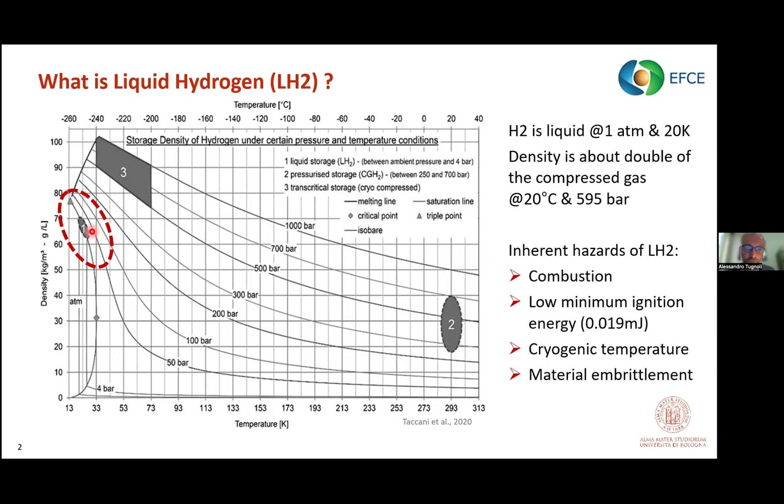What are the inherent hazards of hydrogen in this condition? Well, we still have the same hazard we would have in gas condition, so potential for combustion, actually quite easy ignition. The ignition energy of hydrogen is known to be at least one order of magnitude less than that of hydrocarbon vapors. But beside that, we are also at cryogenic temperature, very low temperature, 20 Kelvin as I mentioned, so that adds a new form of inherent hazard. Beside that, there are issues with material compatibility. Hydrogen is already known to cause some embrittlement phenomena by itself, through its interaction with metals. Here, at low temperature, that of course makes embrittlement even more critical, especially for materials that have not been designed for that scope.

So why do we want to use liquid hydrogen? Well, the idea is to have available an energy vector with, as mentioned, quite high energy density. Hydrogen has been extensively proposed as a future energy vector. We need energy vectors because the exploitation of some sources of renewable energy is non-programmable, so we need to match availability of the energy with the demand. But we also need to be able to transport this energy, possibly long distance, and therefore these kinds of vectors are of interest. They are also interesting when the final application of the energy is on a mobile vehicle, for example a heavy-duty truck, because that's what we are really familiar with using oil-derived fuels, basically, to store energy on the vehicle and let it propel.

Liquid hydrogen is not an entirely new technology. It has been exploited for several decades in the space exploration field. But that's a very specific field, and the needs and technology for a more widespread use will be different. So there's some experience, but it cannot be immediately expanded to the future setup.

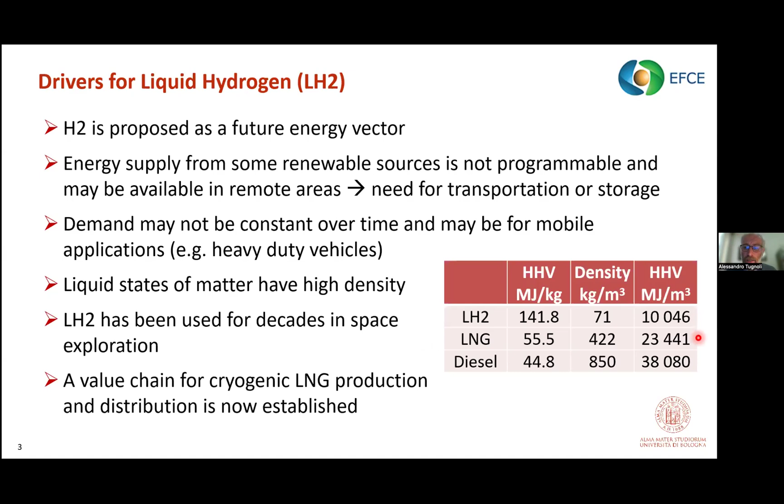The expected value chain can actually be quite well compared with that of LNG. We have the classic phases of production, liquefaction, shipping. The shipping is expected to occur mainly on carriers at sea. But then we have phases of distribution and use, which may go into areas where we have general population, while all the other phases may be restricted to industrial zones where risk management is already a practice.

In public areas, we are introducing a new hazardous material with specific features that have to be properly considered. This is, of course, under the idea to use hydrogen directly as a fuel on the final user vehicle, as currently proposed for trucks and boats, but also proposed for future application in the aviation industry.

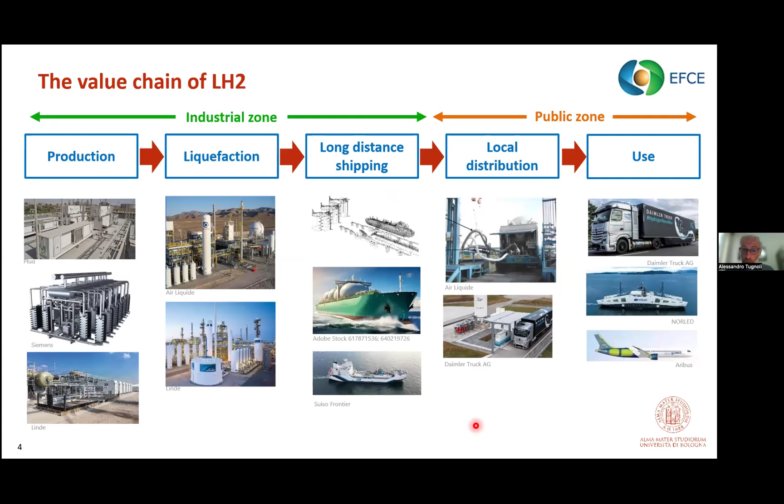Now, what will be the open safety issues — what I'm going to talk about in my presentation? Well, basically, the first series of issues present a concern with the description of the hazards present in this field. There's not yet complete understanding of the fundamentals underlying some of the accident scenarios we may expect. We have a lack of data, especially experimental data, and the models out there proposed for this application are, because of this lack of data, not fully validated.

More in general, in the risk assessment of these technologies, we have to face the fact that they are emerging technology for which there's not unlimited past experience, and that hinders a number of considerations in risk evaluation and management. And finally, we have to consider that the regulatory framework is not yet established.

Now, when I'm talking about new technology, let's see how large-scale storage is implemented so far in the space industry. The main way to store large quantities of liquid hydrogen is by tanks that are spherical in form, which reduces the surface per unit volume, and built with a double layer with vacuum insulation in between. There's very low pressure, a few pascals, and there may be some filler which limits the radiative heat transfer.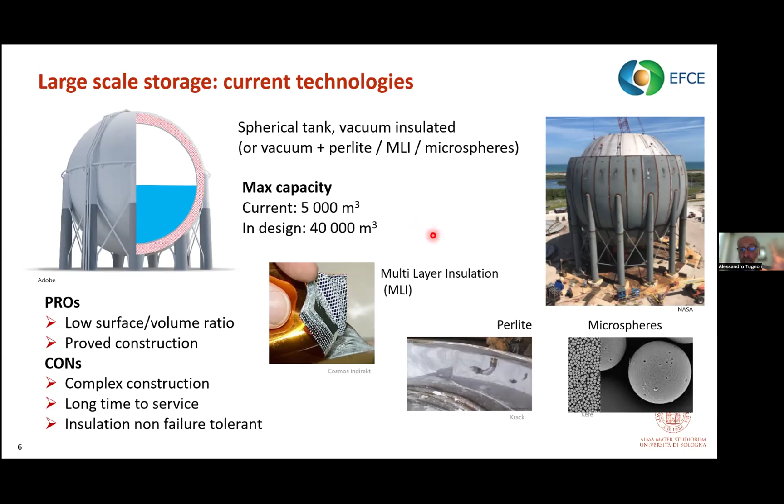For example, multi-layer insulations. Now, the construction of these tanks, even though we have decades of experience, is known to be very costly, very complex, with a long time to market and very low failure tolerance on something that can get wrong. Plus, the current maximum sizes we have are much lower than expected for future application — an order of magnitude higher than even the current designs. So this is not expected to be the way to go.

That's why research went for new design, new concepts. For example, a very promising concept is to move out of spheres and go to prismatic tanks, similarly to what was done in the LNG industry. That way, the construction of the tank can be more similar to tanks we have experience building, and possibly cheaper in terms of costs.

That, however, requires new solutions. For example, a solution recently under development within the NICOLHy project, a EU-funded project, is vacuum insulating panels, using pre-assembled panels where you have a filler, an envelope, and vacuum basically in the porous part of the filler. So you can assemble these bricks of vacuum — you stack them and make your insulation in a way that should enable more efficient and easier construction of this kind of system.

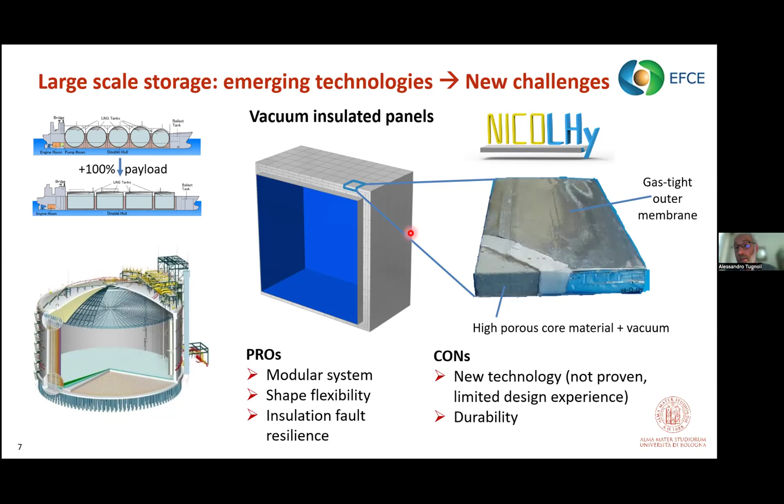However, this is an entirely new concept. We have no previous experience of this. So you can understand that getting data on long-term reliability and on behavior in anomalous conditions is critical for the safety assessment.

I made the example of the storage that we expect to have in large quantities if we want to distribute this capillary, but there's also the issue of the distribution station, like for example a fuel station for a heavy-duty truck. Here, we need to transfer our liquid hydrogen from the storage at the station to the vessel of the final user. And a similar problem we will face in transferring for restocking the fuel station, so bunkering operations for fueling ships.

And well, these operations are expected at least to be carried out partially with manual action, and they are very complex. You need to purge all the connectors. You need to make sure the cooling down is done correctly to prevent formation of ice and so on.

And as we know, in any complex operation, there's potential for human error. Especially, that's not something new. We don't know how to tackle in general. We know how to manage human reliability in safety critical systems, but implementing it in these new systems that have to be designed, systems that have to be fully understood for their dynamic behavior, is of course a critical aspect in the implementation and achievement of safety.

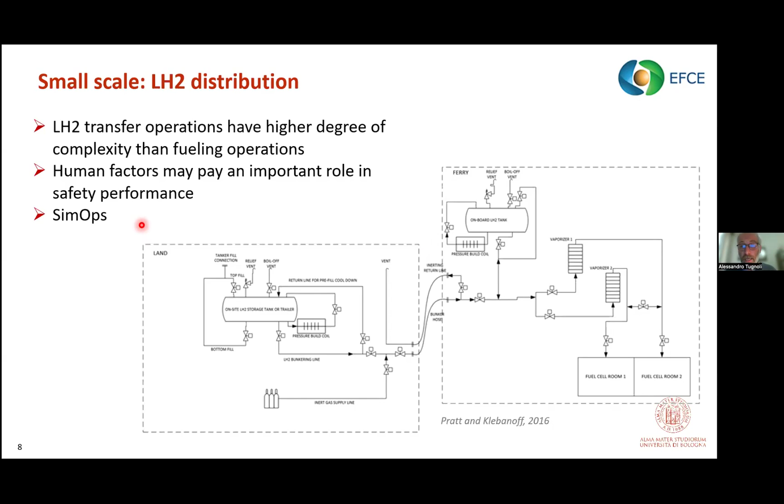Also, SimOps, another thing that we are already used to study, have to be explored in this field, because while you're carrying out a fueling operation, you may have other fueling operations going on, or other operations like loading loads on the ferry that you are fueling. So that's something that, again, has to be translated in this field.

Going back more closely to the risk assessment, there's an issue about the accident scenarios that we may expect from this kind of system. Here I did a little exercise. I asked someone that was not entirely expert in the hydrogen field to implement a standard tool for identifying hazards, for building an event tree, with a reference to a large-scale tank of hydrogen and a large atmospheric tank. And you see here the scenarios that were proposed.

We have, for example, pool fire. Well, that makes sense. You are storing a liquid, you spill a large quantity of it. Upon relatively soon ignition, you may have something that looks like a pool fire. Well, we don't know if this is the case for liquid hydrogen. There's no experiments of such large scale releases. There are experiments with spills, but the pool size is still quite limited. So we don't know what happens really for very, very large scale.

And this can be applied also to other scenarios. So even for the scenarios that are conventional for other hazardous materials with similar characteristics to hydrogen, well, we don't know how they behave in case of hydrogen. And of course, that hinders the development of consequence models. Are they valid for this scenario? Are we trying to extrapolate from what we know too much? That's surely an open question.

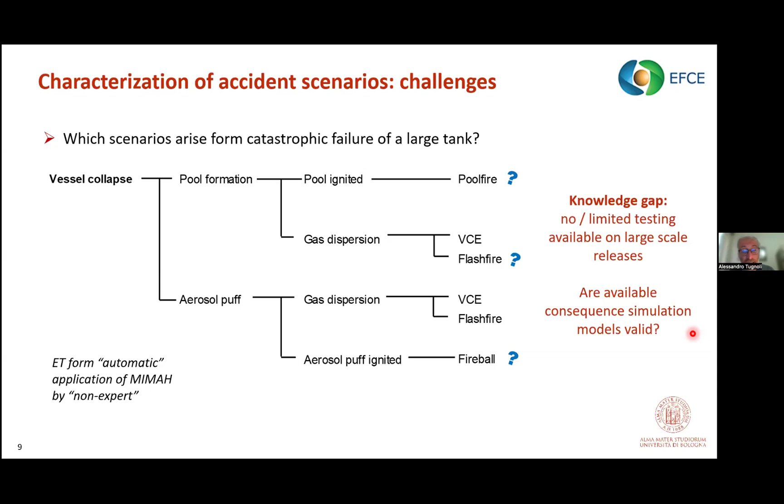But beside the scenarios that are shared with other flammable materials, here there are also specific scenarios due, for example, to the particular conditions in which we are operating. At the temperature of liquid hydrogen, the main components of air, oxygen and nitrogen, will condense and possibly freeze. Nitrogen will freeze for sure. And that creates a form of solid, of ice, which affects the behavior of spilled hydrogen.

And in particular, there's a concern about oxygen, because if you bring oxygen to condensate phase, you unlock the potential for condensate phase explosion between the liquid oxygen and the liquid hydrogen. And that kind of event, we don't know if it's practically possible, if the mass transfer allows that, basically, in this spill condition. In fact, there are tests going on as part of the ELVHYS project, because the phenomenon possibly occurred once during an experiment in the past at the HSE, but was not in controlled conditions, so it's not clear what exactly was going on. So we need more tests, as the ones planned within the next year, to understand if this is practically possible or not.

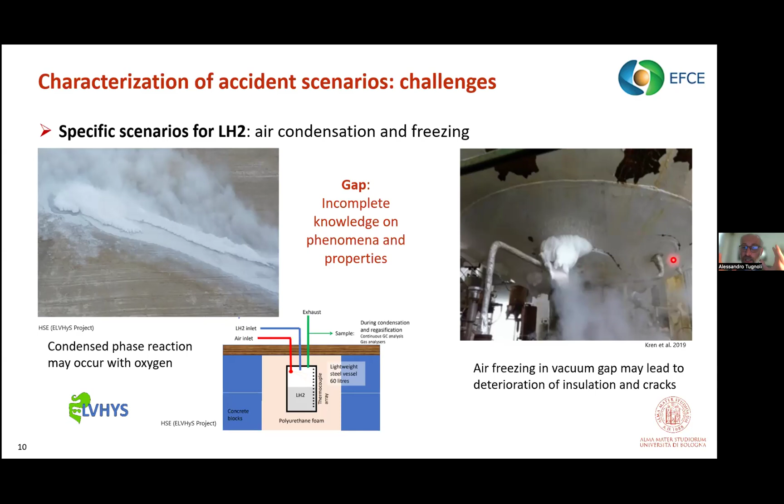So understanding of all these phenomena is obviously interesting. It is obviously a key for safety.

There are some scenarios specific to other cryogenic fluids that we've been wondering about for a while, whether they're possible, or at least likely, also for liquid hydrogen. I'm referring, for example, to rapid phase transition, the sudden explosive evaporation of a cryogenic fluid when energy is available from contact with another surface. We know this occurs for LNG in contact with water. So the question has been, is that the case also for liquid hydrogen?

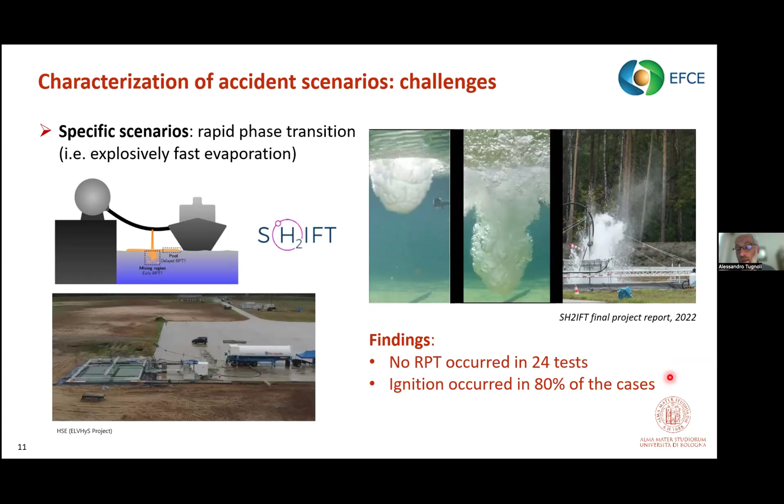It's important to carry out real-scale tests, because thanks to the SH2IFT project, a Norwegian project carried out a few years ago, we now have testing showing that over 24 tests, rapid phase transition did not occur, so it doesn't seem to be a highly likely phenomenon. However, thanks to this test, we know that ignition in this kind of situation is extremely likely, probably due to corona effects on ice crystals created during the spill. That's something that has to be taken into account in risk assessment, which we were only able to learn through deepening the experimental understanding of the phenomenon.

Jets. If you store hydrogen in large tanks at ambient pressure, there's no potential for jets, but for small storages, some degree of pressurization is expected during operation, and so jets can be formed. What's the effect of these jets if not ignited, on materials that are not designed for hydrogen? We don't have a protocol or standard yet for testing that.

What about if they are ignited? In that case, it seems the behavior is similar to a gaseous hydrogen jet. The vaporization occurs relatively quickly, so we can borrow from what we've learned developing models for gaseous hydrogen. But even with those models, there's a lot of open questions, for example about the interaction of these jets with surfaces, the potential heat transfer, the potential damage from the momentum of the jet, and fireproofing located on surfaces you may want to protect. So it's something that presents quite large gaps of knowledge.

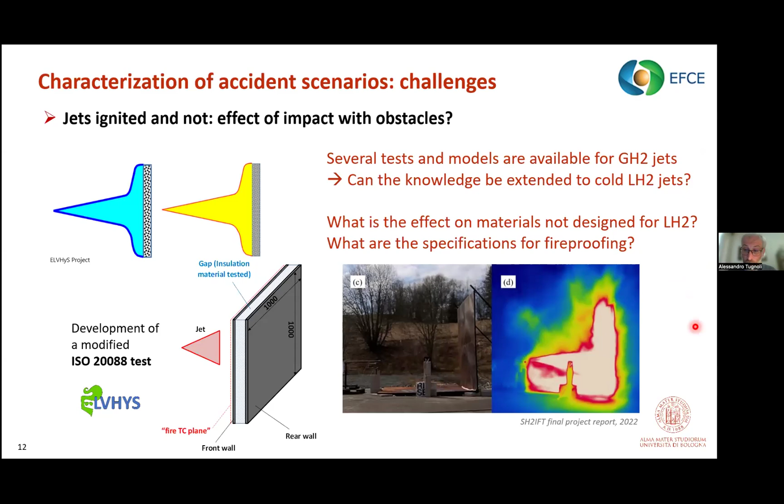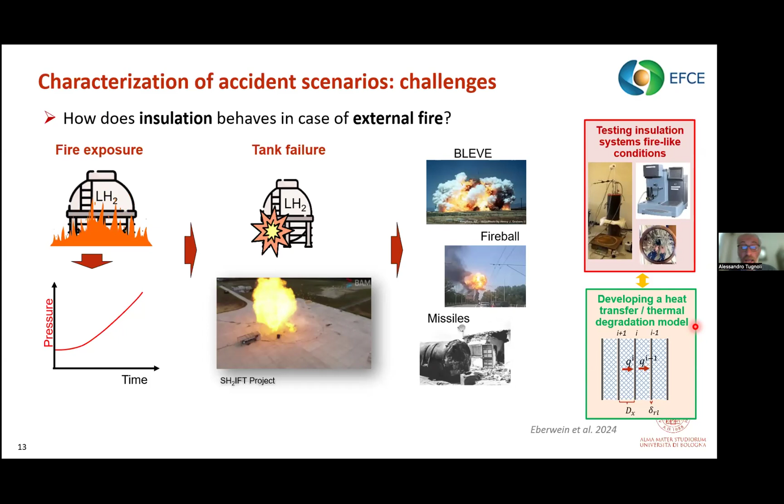If you think of a small vessel, it's possible it could find itself in an external fire area, which may damage current insulation systems designed to prevent input heat flux in normal operating conditions, but not in fire conditions. Here I'm presenting results from a study by colleagues who chose to explore this using data collected at small scale. Collection of data is important, but even preparing preliminary models that rely on that data to simulate expected tank behavior, without doing a full-scale test, may help us understand the potential for these phenomena, and possibly design better tests for fully exploring them.

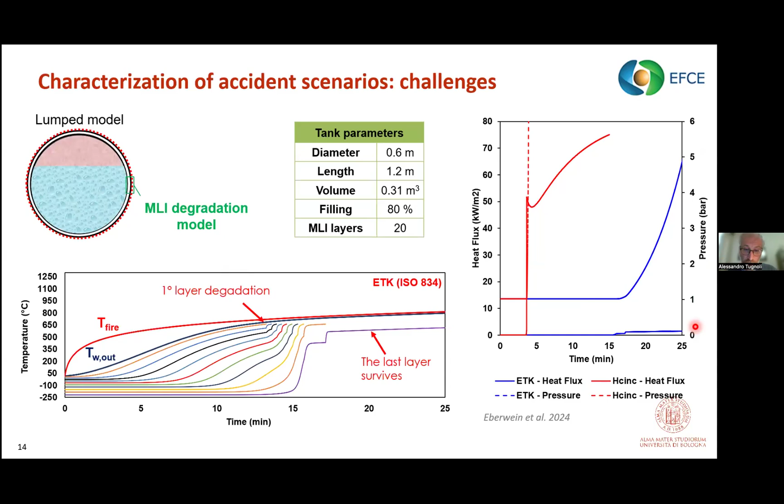When we model these phenomena, we also have to consider that at small scale, accident phenomena may evolve very quickly. The dynamic nature of this has to be taken into account during modeling, which makes CFD modeling very promising. But also in developing engineering tools and integral models, we have to be able to tune them while keeping this kind of effect in mind.

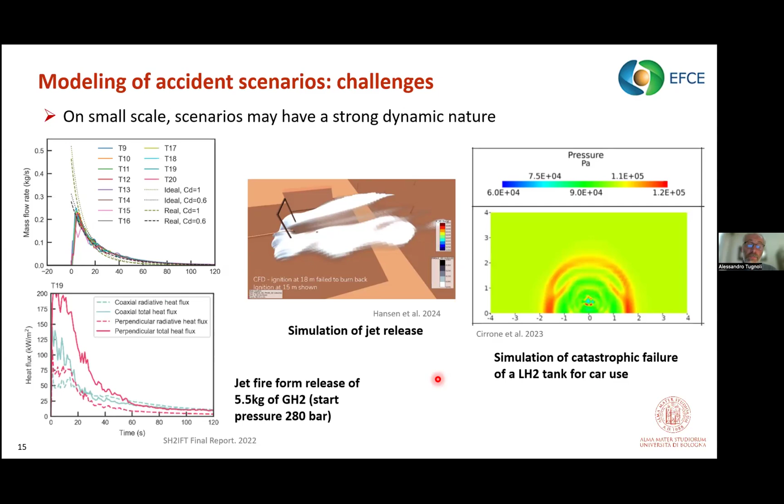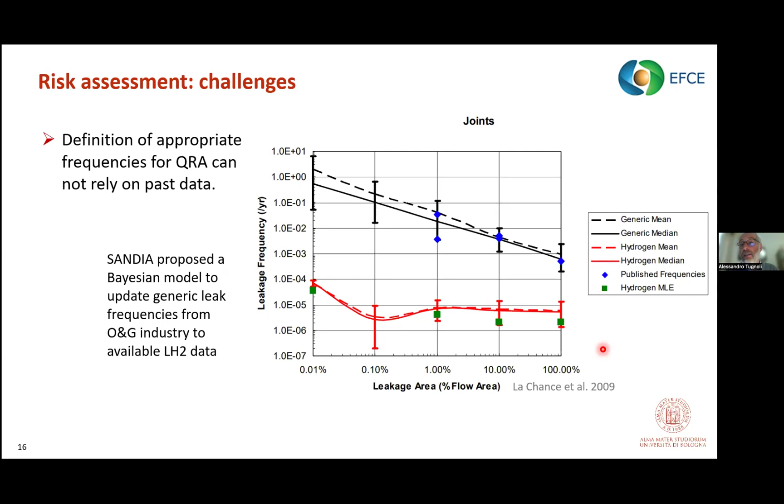About risk assessment, we also have to face the fact that lack of knowledge about new technologies makes it very critical to estimate parameters like release frequencies and leak frequencies, which are fundamental for quantitative risk assessment strategies. There have been attempts to fill this gap. For example, here you see results from a Sandia study that used a Bayesian model to extrapolate information available from leakage frequency in the oil and gas industry to the hydrogen industry. Of course, the quality of this extrapolation depends on the quality of data available, and since very few data are available for hydrogen, one should be careful implementing this result, especially because it shows, as you see in this diagram, a behavior very different from the system we know, a few orders of magnitude lower in frequency of release. Is that due to the high standard of these components, or due to underreporting of these kinds of events? That's something to closely monitor and explore in the future.

Finally, regulations and codes. Working in a context in which we want to implement in real life the industrial applications of liquid hydrogen, we need to be compliant with regulation. The regulations are currently in many countries still under development. Up to now, they have been focusing mainly on gaseous hydrogen, and the feeling is that the regulation on liquid hydrogen will just be an extension of that, following some similar rules with adaptation.

For example, the approach of safety distances for land use planning will be followed also in this case. Obviously, safety distances have to be based on consideration of modeling of potential consequences that are affected by all the concerns and gaps of knowledge that I mentioned before.

Beside regulatory bodies, also standardization and technical norms are working actively on this field. As we know, this is a common approach, the one based on standards for widespread mass-produced systems, as will be, for example, the tank of hydrogen vehicles. There's a significant effort, and there are standards currently under development for that, but again, they are based on the current knowledge.